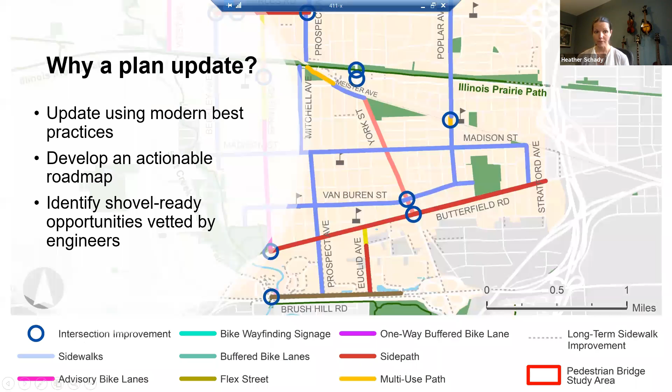This plan is really a plan for everybody in the community, whether you walk, bike, drive, or use some other mode of transportation. However, we do focus on the people who are most dependent on not driving to get around. In any given community, including Elmhurst, about 30% of people aren't able to drive, either because they're too young, have aged out of driving, have a disability that prevents them from doing so, or simply can't afford a car. We want to make sure that all communities are accessible to all people, including those who can't drive. So it's important to look at roads from that context and make sure we're providing safe options for everybody.

By having a plan and implementing it over time, a community can see a lot of different benefits. I won't go into all the research and data, I'll just pull out a few key points.

One key is reduction in traffic congestion, which can also lead to better environmental impacts. Communities that encourage more walking and biking trips will eventually have more people using those as forms of transportation, and therefore less traffic on the roads, which leads to better air quality and better traffic safety. In addition, there are economic development benefits to developing a bicycle and pedestrian plan and implementing it. People who walk and bike to stores are more likely to spend more money over time at those stores than those who drive. And there are other benefits.

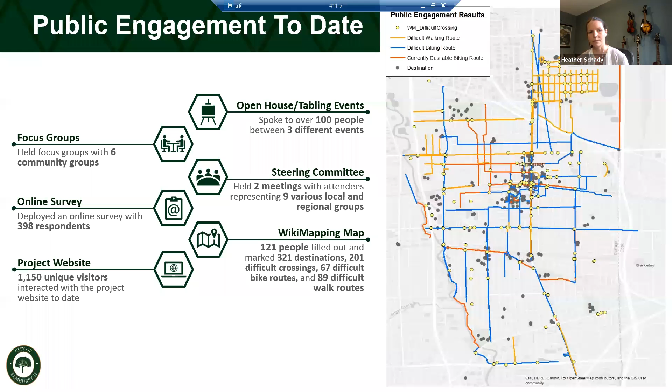In that survey that 398 people filled out, we asked a few key questions to get a sense of people's preferences for walking and biking. One question asked the top 5 factors that influence their decision to walk or bike somewhere. For pedestrians, one of the top ones was shoveled sidewalks in snowy conditions. People told us that if there was no shoveled sidewalk during snowy times, they wouldn't walk somewhere.

Followed by presence of sidewalks, ease of crossing at intersections, presence of trails or paths, and speed of traffic along my route. These were the top five things people selected in the survey among the choices we offered.

For biking, the top choices were distance, interactions with drivers—so whether it was a positive or negative interaction that might impact your decision to bike somewhere—comfort of crossings at intersections, presence of trails or paths, and conditions of the road on my route, such as potholes, leaves, or snow. People may be less willing to ride their bike somewhere than they would if it were a clear route.

Next slide, please. So we also asked people that responded to the survey how far they were willing to walk to reach a destination.

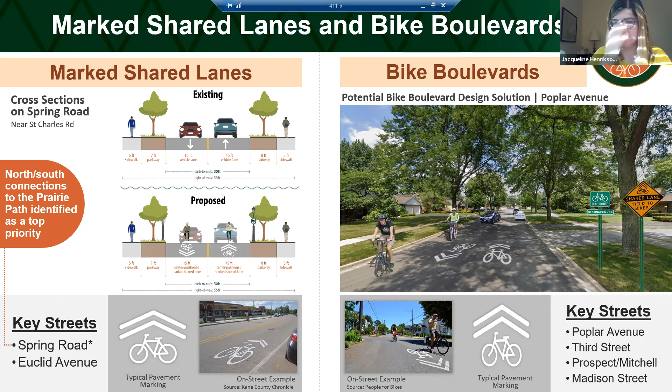And now we will have another poll, which I will initiate. So these questions are asking if you would be more likely to bike with these recommendations and how comfortable you would feel.

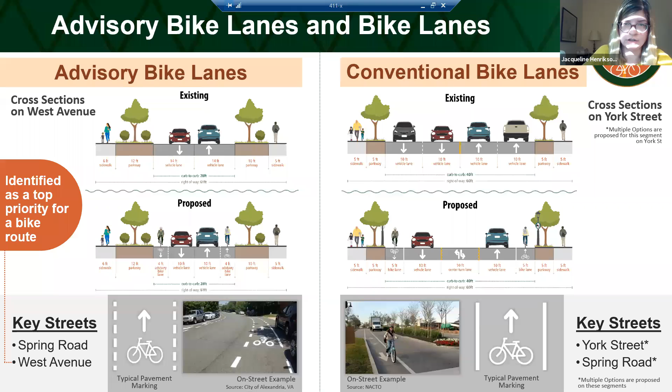Some examples of these you can see here. Advisory bike lanes would be on Spring Road and West Avenue, which was also identified as a top priority for a bike route during community engagement. For conventional bike lanes, we're proposing an example on York Street. There would be multiple options on York, and Spring Road is another street with multiple options, which I'll talk more about later.

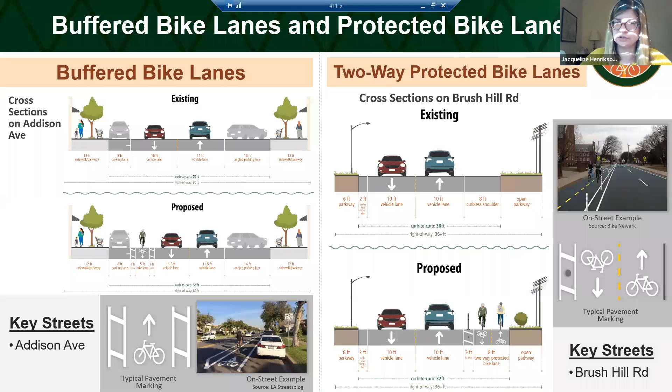Another example would be two-way protected bike lanes. This would take some extra pavement in the shoulder on Brush Hill Road and change that space to a two-way protected bike lane. We were thinking this could help connect the Salt Creek Trail along Brush Hill Road to the hospital, creating a key connection in the network.

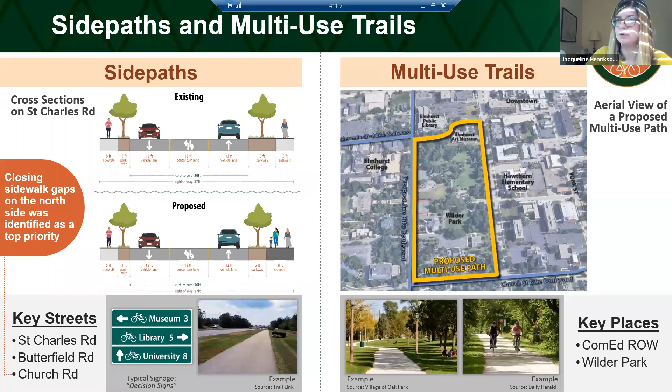We'd also recommend having bike route wayfinding signage on all of the recommended bike routes in the community. That way it helps people know the safe streets to bike on, and the trails and side paths, for people who are less familiar with the network as a whole.

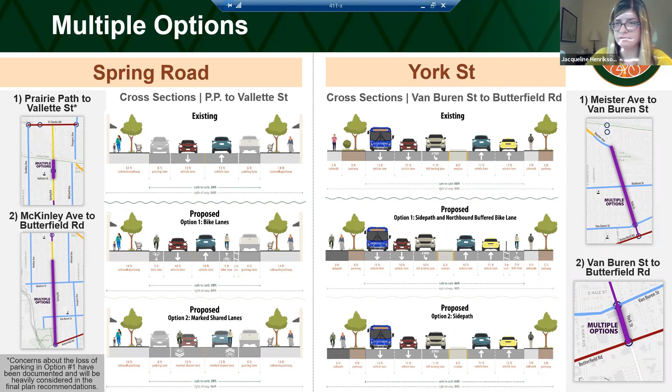York Street, the section between Van Buren and Butterfield Road, is another example. We're proposing bike lanes north of there, and a side path on Butterfield south of there. So we have potential recommendations in this tight, high-traffic area for how we could accommodate bike traffic. One option would be a buffered bike lane on one side of the street with a side path on the other, or perhaps it's best to just go with a side path on one side of the street. But further study would be needed, and we'd love to hear your comments on this, especially in the survey.

And now I will hand it over to my colleague John to talk about some pedestrian improvements.

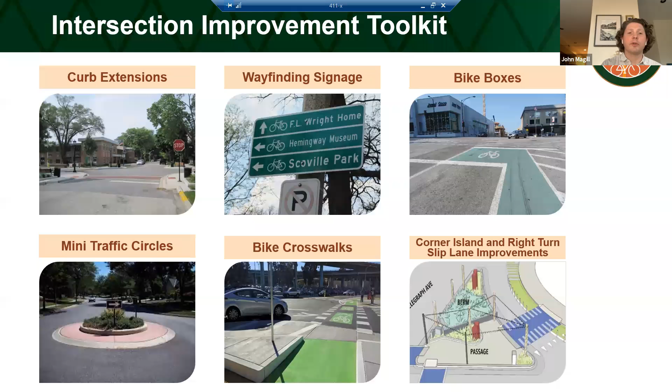I forgot to add that as a Flex Street, the space is flexible, which means you can customize it. If you have a festival or something like that, you can claim the space. Restaurants can move seating into parking temporarily in order to create additional space for people to be.

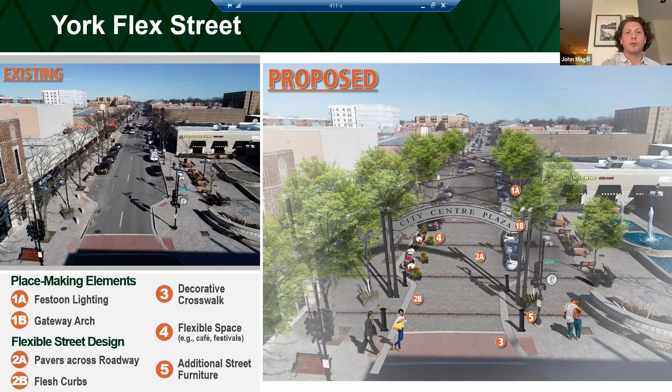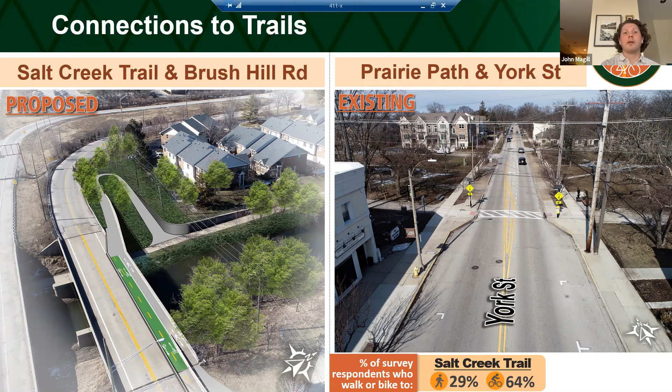And we have two concepts that we would like to touch on.

29% of survey respondents walk to Salt Creek Trail, versus 64% who ride their bikes. Some improvements we're proposing include bumping the crosswalks and stop bars back and making the crossing at grade, so it's a raised crosswalk. We'd also add decorative pavers to the road for the benefits I mentioned, and add chicanes, which are fences, to the Prairie Path itself, which forces people to slow down before they enter the crosswalk.

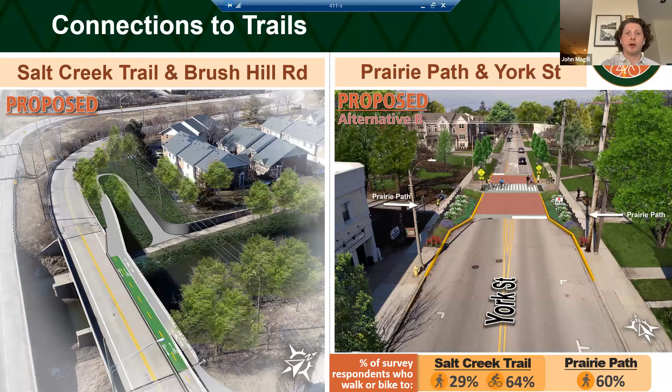Here is alternative B. Instead of the fence chicanes, this utilizes a fence with some green space to encourage people to cross a little bit slower, because you have to slow down to make those turns. Hopefully when you cross, you're going a little bit slower. We would leave the RRFBs in place in this instance.